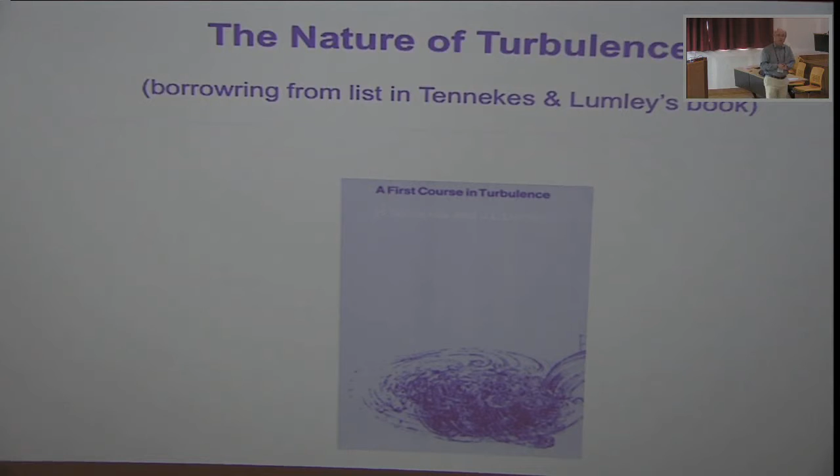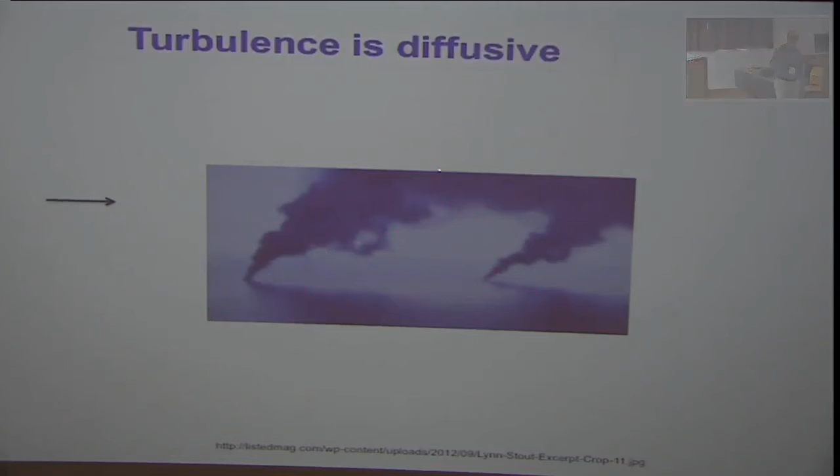And so the book starts essentially by saying that turbulence has fundamental properties such as, for example, being diffusive. So this looks like perhaps an experiment in some kind of water channel, maybe on top of some kind of metal surface that's reflective. So you see the shade of this injected dye or another fluid. It's turbulent, so it's very diffusive. It grows, it mixes very effectively. But turbulence is not just that, it's also a property of a continuum, and it's multiscale.

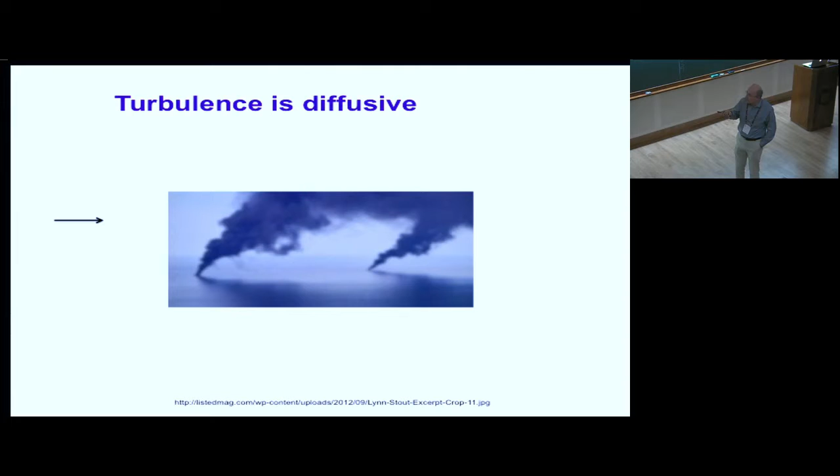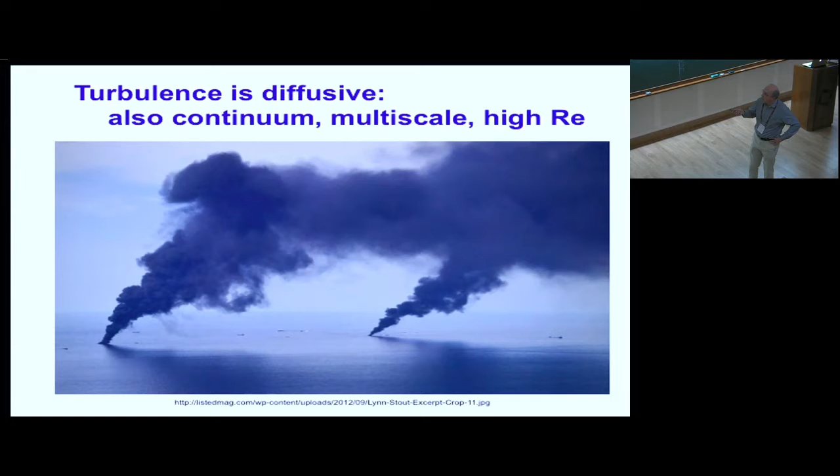And this picture, as a matter of fact, I just fooled you. This is not in a laboratory tank with a reflective metal surface. It's a photograph of fires following oil spills, and this is in fact the ocean surface. You can see the little ships here. And so I guess the sense of scale is important. We cover a lot of scales, the main theme of this conference. And here we see the diffusion happening as well. In this case, it's a very high Reynolds number. Turbulence is multiscale, so these are other properties of turbulence that are worth remembering.

Again, in terms of diffusion, you can also look at how a surface will be deformed and particles on the surface will be mixing together. This is a famous experiment done at Hopkins by Mike Karweit in isotropic turbulence, the wrinkling of a surface. This is done on a computer using direct numerical simulation. Again, just figures of the diffusion of turbulence.

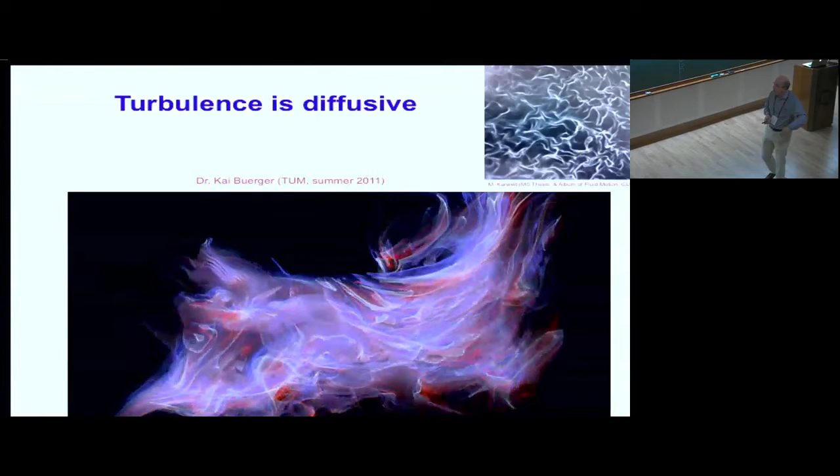This is not a movie. Normally the mixing of cream and coffee is meant to illustrate mixing and diffusion as well. Here I'm asking you to imagine that you first stir it and there's some turbulence happening and then you just let it be. And obviously turbulence is also dissipative in the sense that kinetic energy is dissipated. So imagine the decay of kinetic energy in these eddies illustrating the dissipativeness of turbulence.

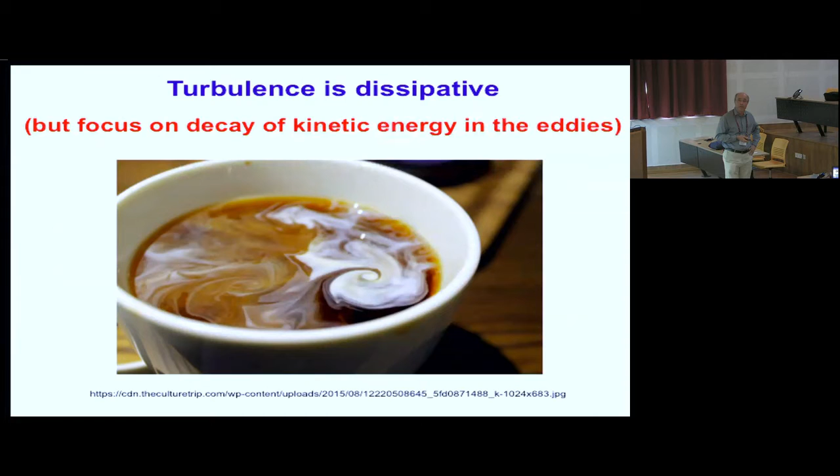There's vorticity fluctuations, and it's three-dimensional. This is obviously now a very classic way of visualizing the small scales of turbulence. In this case, we're visualizing the magnitude of the vorticity squared, and so it's a visualization of the famous Kolmogorov scale worms, tangles of turbulence.

One other aspect that I think is quite noticeable is the fact that this is clustered. It's not the spatially uniform distribution of vortices. There are regions where there's more of them. Here there's a lot of them, and then there's these kind of more dead regions. This is associated with the multiscale structure of small-scale intermittency.

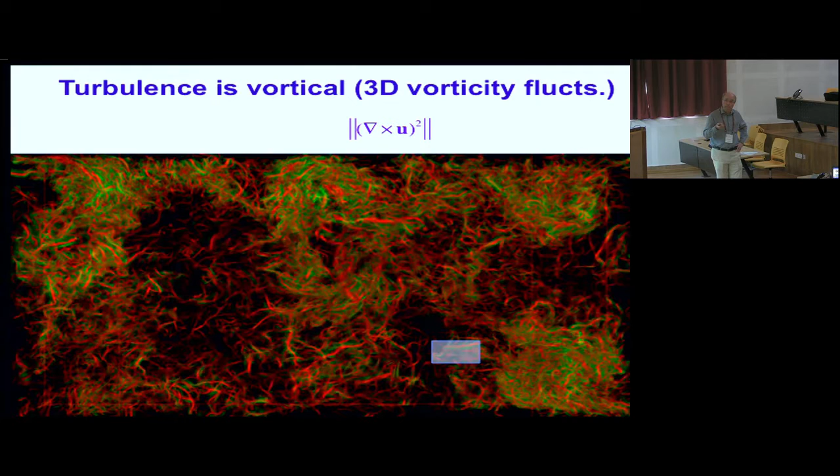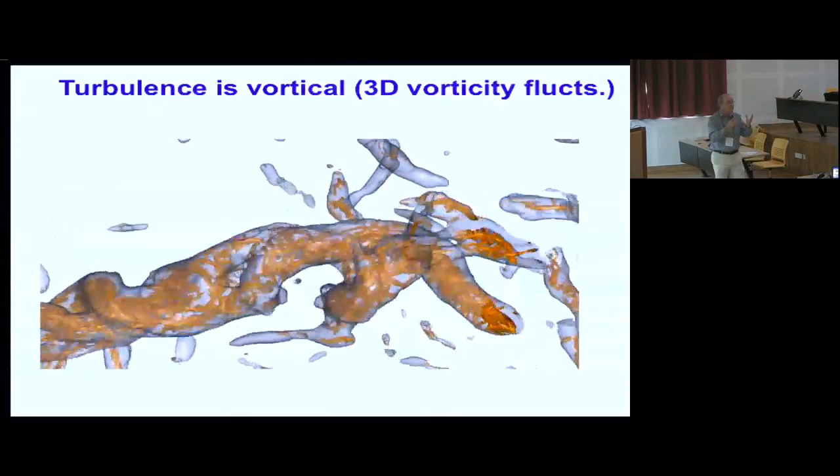If you zoom in here, you can actually create the following animation. So in the preceding talk, Professor Zubrek mentioned the tangling of quantized vortices, that you can in fact coarse-grain them and look at them at bigger scales, and then some more classical-like phenomena occur. This is from a direct numerical simulation of isotropic turbulence, where, I actually want to go back to the preceding one, this one.

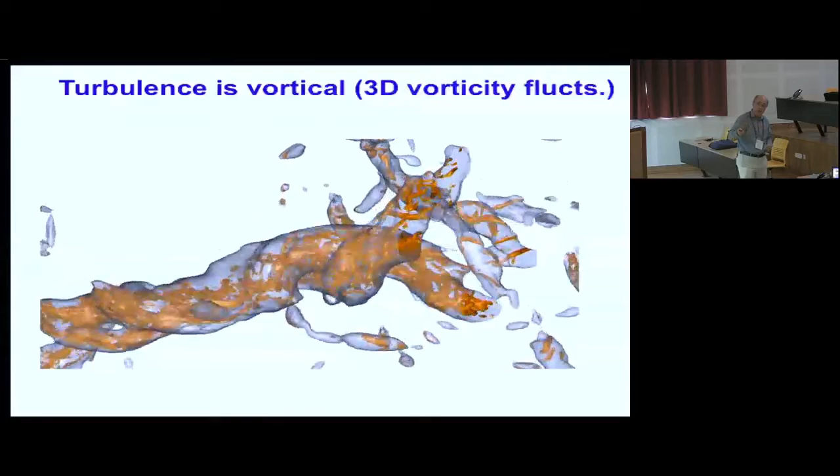So what we've done here is we've filtered the velocity, calculated the vorticity, and generated, in some sense, coarse-grained vortices, and then looked inside those vortices at the Kolmogorov scale, small-scale vortices, and you can see how they're grouped together, forming this larger scale one, but the larger scale is, in fact, twisting and stretching the smaller scale motions. Here you can see a superposition of the same thing at three separate scales. So three-dimensional, time-dependent vorticity fluctuations.

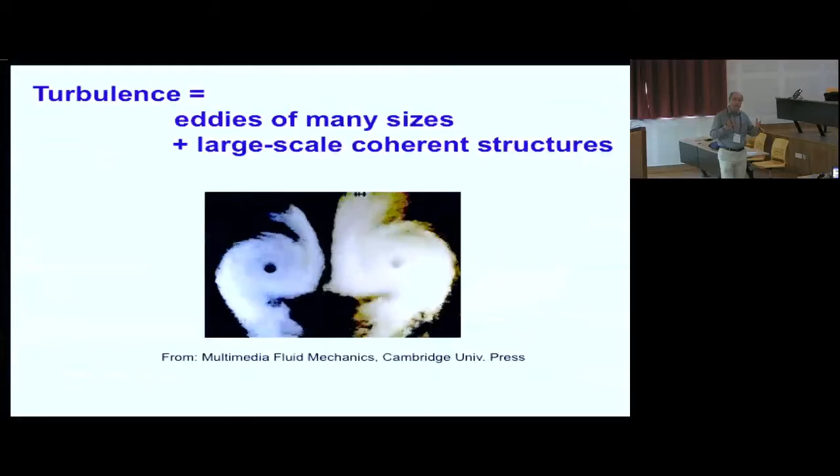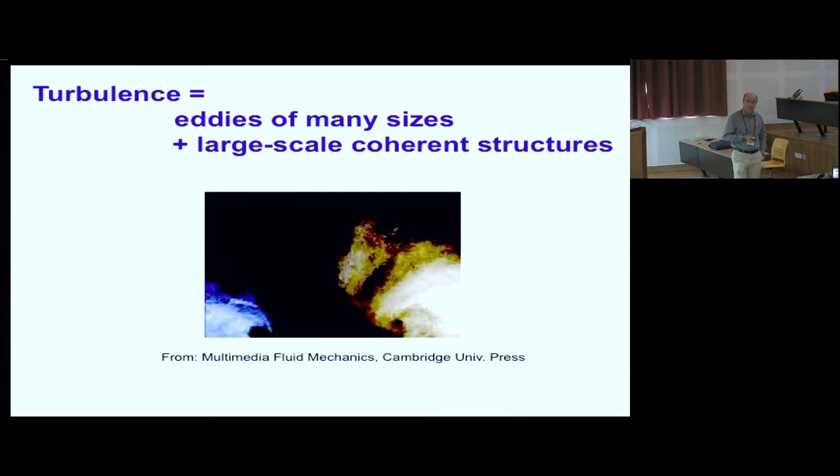This particular one is not really in Tennekes and Lumley, but one might want to add that there's eddies of many sizes in turbulence, but also there's presence of very large-scale coherent structures that are often very long-lived and are very visible in turbulence. And there's a lot of very fruitful research in coherent structures that has occurred.

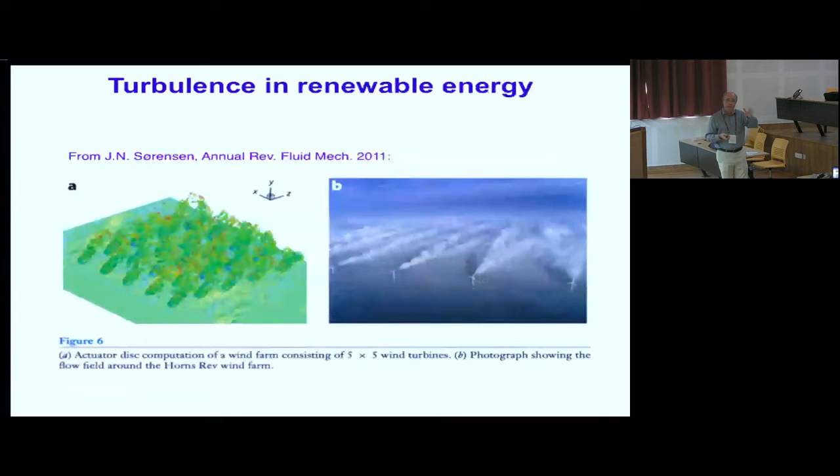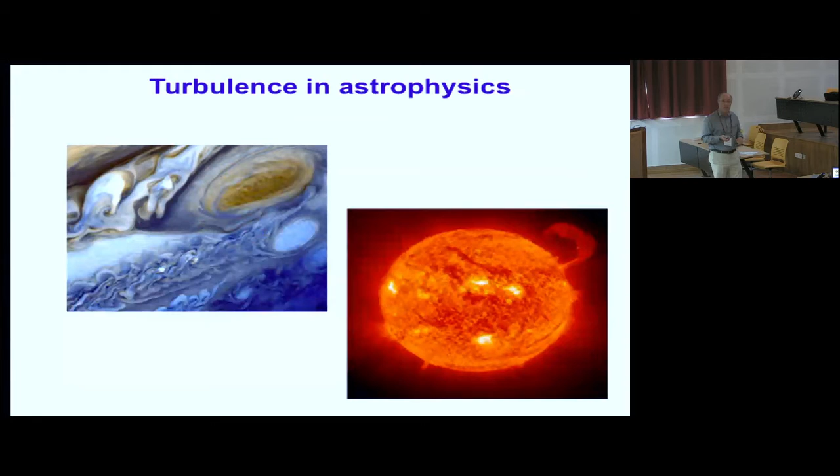In terms of applications, aerospace, combustion, environment, renewable energy. Tomorrow I will talk quite a bit about this one. Again, geophysics, environmental, astrophysics, going to bigger scales. So these are the things that you know.

The simplest type of turbulence, as we know, is isotropic turbulence. I'll talk quite a bit about isotropic turbulence, as a matter of fact, because as you will see, we will be specifically interested in the rates of decay of turbulence. Turns out that's a really important aspect when we need to model turbulence. And this is generated in a wind tunnel. You can generate it with a grid.

It can be a regular grid, or here we built an active fractal grid to inject turbulence at multiple scales. And then you have turbulence in the core here, over small distances, that is statistically reasonably close to isotropic, and then as you follow the mean flow, it decays at a particular rate. This is obviously the canonical, simplest type of turbulence.

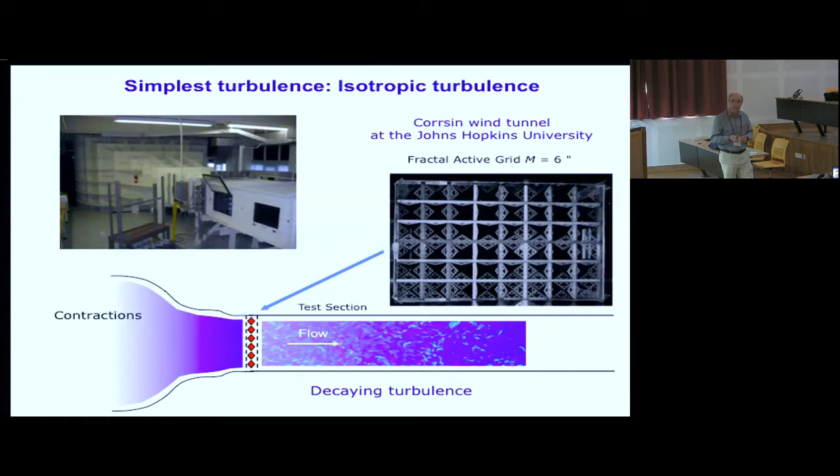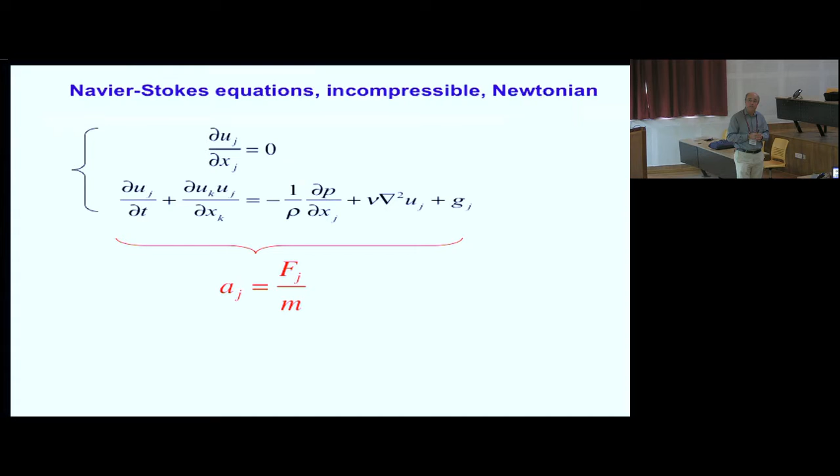So, in terms of describing turbulent flows, again in the classical world, we will focus on incompressible single-fluid Newtonian fluids. So the Navier-Stokes equations, essentially F equals ma. Very familiar to us, and the three classical, typical levels of modeling, if we are faced with a problem of predicting a particular flow, occur at the following three levels.

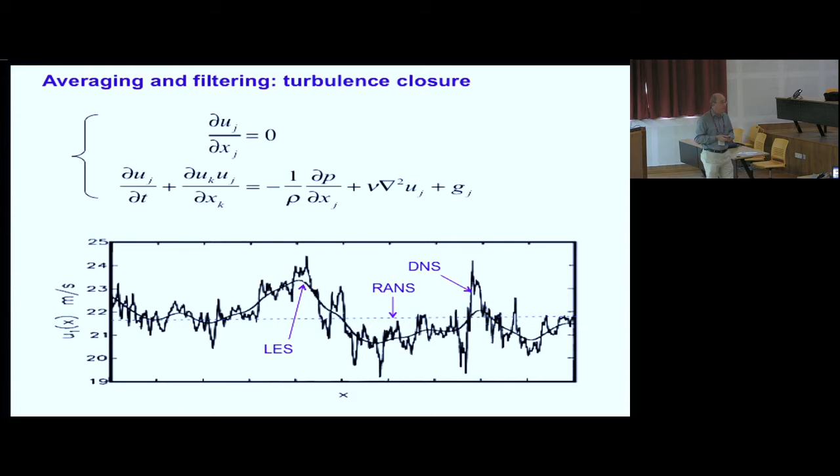So direct numerical simulation, where we're resolving all the scales. At the other extreme, if we do either an ensemble average or, for statistically steady state flows, time averaging, we are talking about the world of Reynolds-averaged Navier-Stokes. And then what I will spend most of the time on is Large-Eddy Simulation, somewhere in between, where we keep some of the larger scale motions directly resolved on our computer, and we are faced with a challenge of parametrizing the effects of the small scale motions that are not explicitly resolved on our grid. So that's what I will spend most of the time on.

In terms of the traditional engineering approach, there is a Reynolds decomposition. Obviously, it's over 100 years old, where you take the Navier-Stokes equations and you perform a linear operation in terms of averaging. Again, it can either be ensemble averaging or time averaging. Let's imagine we do time averaging for statistically steady state flow, so this first term here will drop.

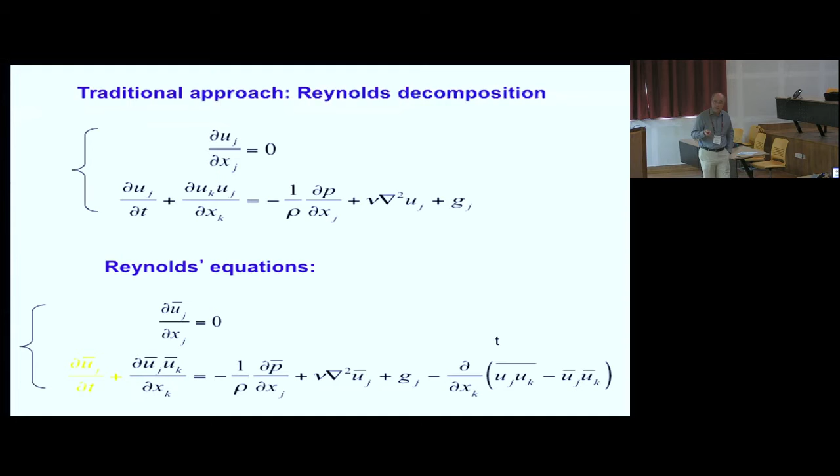And the simplest way to do this is to put an averaging operator on top of each of the terms and then rewrite the advective term by sums and differences, I don't know what this T here is, by putting the term that we used to have here on the right-hand side with a minus sign, so it's essentially the average of the nonlinear advective term, and then add and subtract on one side the product of the averaged velocities. And this is, of course, the Reynolds stress tensor that needs to be parametrized and is modeled in Reynolds-averaged descriptions.

Normally you will perhaps not have seen it, or it's not normally written in this way, but obviously using the properties of averaging, this expression, essentially taking the Reynolds stress to be the difference between the coarse-grained nonlinear, or the coarse-grained momentum flux, minus the momentum flux due to the coarse-grained velocities, and those two things are obviously not the same, that difference can also be written as a covariance between the fluctuations. And so typically this is a more familiar way of seeing the Reynolds stress tensor. That's kind of all I will say about Reynolds averaging.

Now it turns out, sorry, I'm kind of not doing this. So it turns out that to model this stress tensor, to model these correlations between fluctuations of turbulence, the internal structure of turbulent flow becomes very important. So now it really becomes important to understand how turbulent eddies, how different components are correlated, what are their length scales, what is the shape of these eddies. All these internal structural properties of turbulence enter in understanding this. And that's why we're also, from a pragmatic viewpoint, very interested in the spatial structure of turbulence.

And there, the simplest descriptor of structure is the statistics at 2 points. And so the statistics at 2 points can be looked at by structure functions, where the simplest object we can build is the longitudinal velocity increment. So it's the difference between velocities at 2 different points, and one of the components is the longitudinal one. The most famous object there is the structure function, so it's how much energy this particular velocity difference has, so that's the second order structure function.

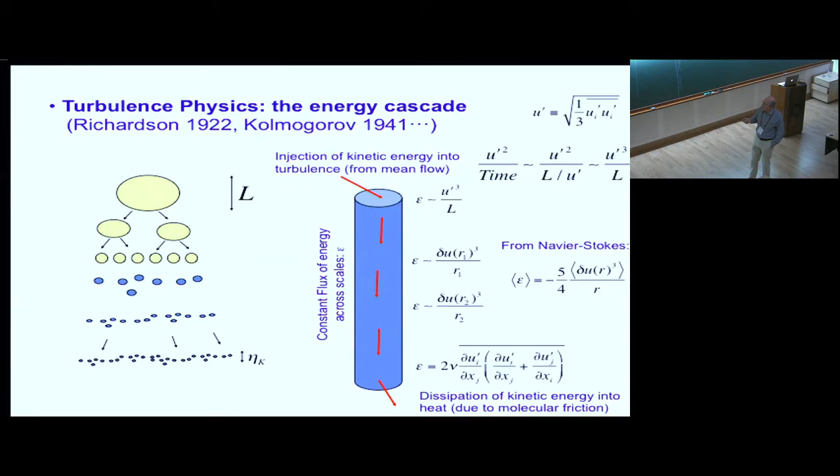And again, in terms of the dynamics and the physics of turbulence, the simplest view is, of course, the Richardson-Kolmogorov view, where if we look at the rate at which the turbulence is receiving energy by the large scales, so the large scales will have, for example, the RMS velocity squared, that will be the kinetic energy at the large scales, divided by a turnover time, you get U cubed over the largest scales of the eddies. That same reasoning, if you apply it at various smaller scales, gives rise to the notion of a cascade of energy, where the energy dissipation then takes place at the smallest scales in classical turbulence. Quantitatively, if that flux is constant, you get to the famous 2/3 law, or to the minus 5/3 energy spectrum.

In terms of direct numerical simulation, I will not say too much about DNS either. Essentially, we are now able to do this at moderate Reynolds numbers. Depends how you define the Reynolds number, what particular number one wishes to quote as where DNS is possible. But essentially, if we are able to simultaneously resolve some small fraction of the Kolmogorov scale, as well as the system size where the large eddies are present, then we can do DNS, but at higher and higher Reynolds numbers, obviously, direct numerical simulation becomes impossible, because we cannot afford a grid fine enough to resolve down to the Kolmogorov scales.

So that brings us then to the realm of what's called large eddy simulations, where essentially we want to do a spatial coarse graining of the flow so that we can do simulations in a more affordable way. And so, for example, here, this is a DNS of 1,000 cubed where you see color contours of a velocity. This has about 4 times 10 to the 9 degrees of freedom. This is quite expensive to do.

If I want to do a large eddy simulation of this, I might imagine first applying some kind of coarse graining operation on the spatial distribution. Could be some kind of spatial filter, for example, and bring this down, for example, to 10 to the 5 degrees of freedom. This is something that can be very quickly computed nowadays and is more practical if we needed to do simulations of some system where we want to vary a lot of parameters and do a lot of inexpensive simulations.

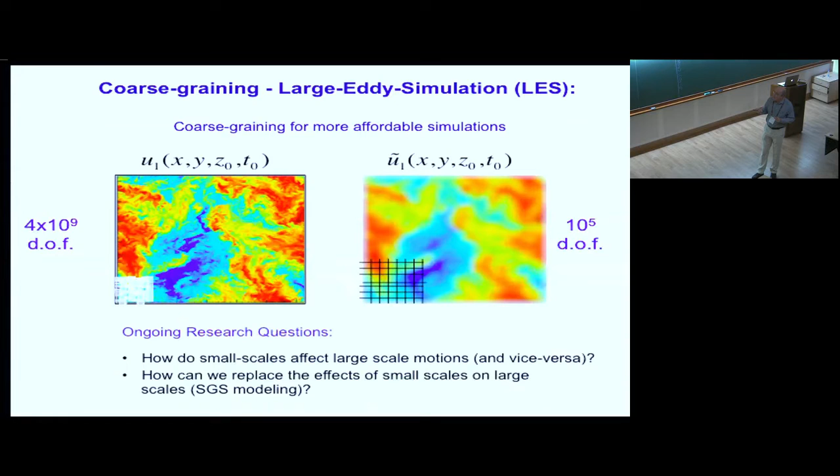In terms of the nomenclature, I will use a tilde to denote filtered properties. And so in terms of the mechanics, how you move forward in LES, you would again start from the Navier-Stokes equations and again define the filtered velocity. This is this coarse-grained velocity field as a convolution with some spatial operator. This is a filter, could be a spatial filter with a characteristic scale delta applied to this velocity field.

And then very much like the ensemble averaging that we did in Reynolds averaging, we will apply this operator to this entire equation. And if you do that, then you essentially put a filter on top of this. Now, obviously, this is a time-dependent flow, so we cannot get rid of the time-dependent term. The nonlinear term here now is simply filtered. Here I'm using the fact that the spatial filtering and the derivatives will commute. There's some technical details there. That's not always the case, but typically it is. And so the other terms just get this tilde on top.

Now, this is, again, just like before. It's just going to be rewritten by writing this filtered momentum flux in terms of the product of the filtered velocities, and the difference between the two is put on the right-hand side as the divergence of a stress tensor, and this is the so-called subgrid scale stress tensor. And so, again, it has exactly the same physical interpretation. It is the difference between the momentum fluxes when you take the actual momentum flux and you coarse grain it, and you subtract from it the momentum flux that you would have gotten if you had used the filtered velocity, the coarse-grained velocities, to evaluate the momentum fluxes.

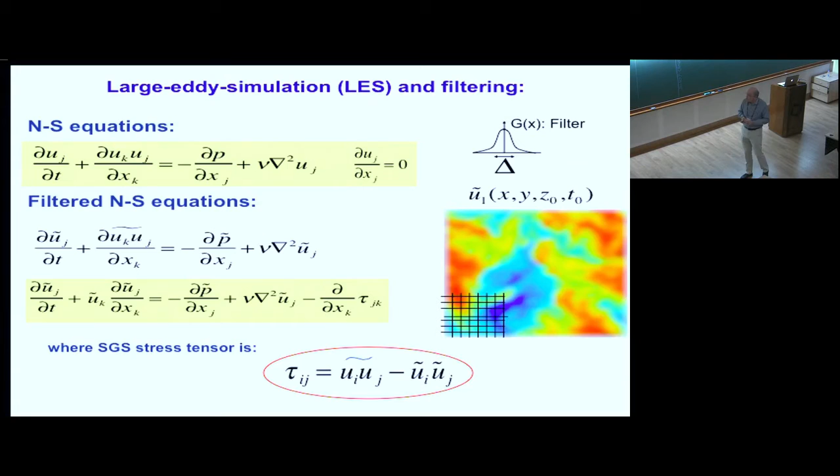So that's the basic quantity that needs to be parametrized. Obviously, this is an unclosed quantity. If you want to put it in this equation to solve this on a computer, we need an expression for this. And here, again, I'm going to just summarize the simplest possible approach, which is to say that the isotropic part of the stress tensor typically can be absorbed into the pressure, so it doesn't really have any dynamical effect.

The deviatoric part of that tensor, if we choose to model it with an eddy-viscosity assumption, is expressed in terms of the symmetric part of the velocity gradient tensor, essentially that these stresses are going to be proportional to the rate at which the fluid at the large scale is being deformed. And in front of this is an eddy viscosity, the subgrid scale eddy viscosity. Now, the big question, even if we accept this, is, of course, how much is this eddy viscosity?

Now, dimensionally, the usual arguments go, this is going to be some length scale multiplied by a velocity scale. So we need a length scale. In large eddy simulations, if your filter scale is in the inertial range or not too close to the integral scale, that does provide a length scale. So typically we pick that as the length scale, and then a velocity scale needs to be picked. And by the usual arguments of closure theory, it has to be things that are Galilean invariant, so it can't depend on the velocity of the frame and so on.

So some norm on the velocity gradients or velocity differences is the best approach, and so you can take the norm of the symmetric part of the velocity gradient tensor, multiply by this length scale. That will give you a velocity scale, and so this gives you delta times the absolute value of the strain rate as the quantity that the eddy viscosity is set proportional to, and then there's a dimensionless parameter in front that represents our ignorance of the problem, and that needs to somehow be determined.

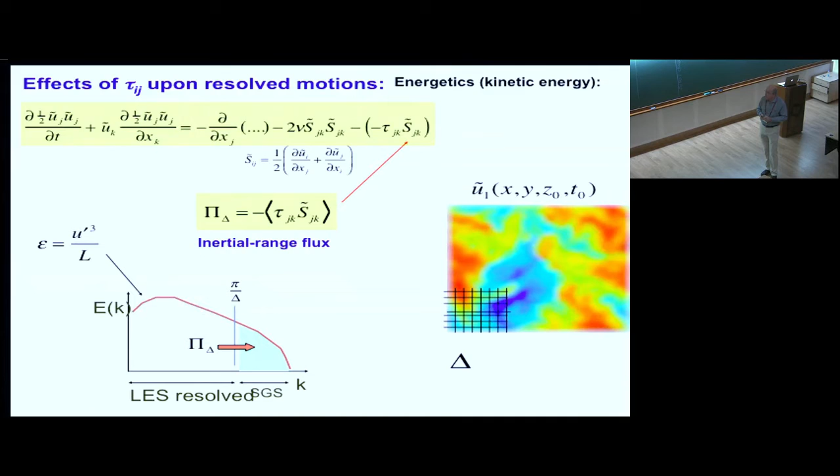Perhaps an addendum to that thought: from the filtered Navier-Stokes equations, similarly to the derivation of the von Karman-Howarth and the Kolmogorov equation, you can repeat that exercise, and for isotropic turbulence, you can derive a sort of 4/5 law for the large scales in large-eddy simulations. If you do that, you show that for the third-order structure functions of the large-scale velocity fluctuations, instead of the molecular epsilon, we obtain this subgrid stress mediated flux of energy in the inertial range. And then there is this additional term that can be shown to be relevant only at scales close to the filter scale.

This is not unlike the viscous term in the original equation, but it is now entirely in the inertial range, and it represents correlations between the subgrid stress tensor and velocity increments at that scale. So in some sense, to get the statistics of the large scales correctly in LES, one can show that there really is a hierarchy of conditions that you want the model to reproduce. The most important one is that the correlation between the stress tensor and the strain rate be such that you get the right extraction of kinetic energy.

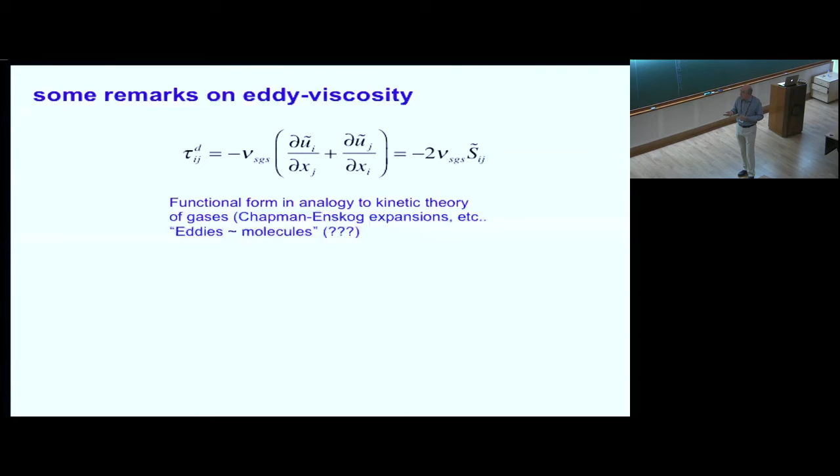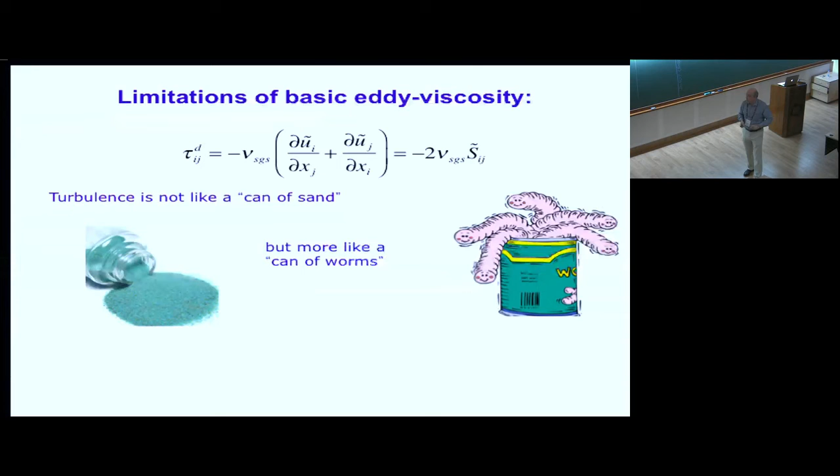One could say that turbulence is not like a can of sand that we shake, but it's perhaps more like a can of worms, that you shake it and inside things are happening, and there's these worms rotating and some memory and so on. So taking this into account, let me just go over a few steps that provide what one might term perhaps a more fluid mechanical rationale or basis for what we call eddy viscosity.

So for this, I kind of need to step back a little bit, and I will do this really in the framework of Large-Eddy-Simulation. So we will be talking essentially about filtering things, and there's a cutoff scale, and what I need to predict is the deviatoric part of the stress tensor. And so again, this is the quantity that we want to predict. It's close to, again, there's a J missing, the kind of covariance tensor of the fluctuations.

And so that is one object. Later on, when we're towards the end of the derivation, the object that I will in fact be really wanting to describe will be the conditional average of this local covariance tensor, given that the large scales have a certain velocity gradient structure. So A is going to be the full velocity gradient tensor at the large scales, and what I will want to predict is the conditional average of this. This can be shown to be, in some sense, the best statistical predictor of the subgrid stress.

So this is the object I would like to predict, and we will not use analogies with kinetic theory of gases. So instead, we will use the following. So imagine I have the small scale. So U prime is some representative small scale fluctuation, and imagine the flow. It is a vector pointing in a particular direction, and imagine that this region of the flow, the large scales are such that there is a velocity gradient tensor A tilde.

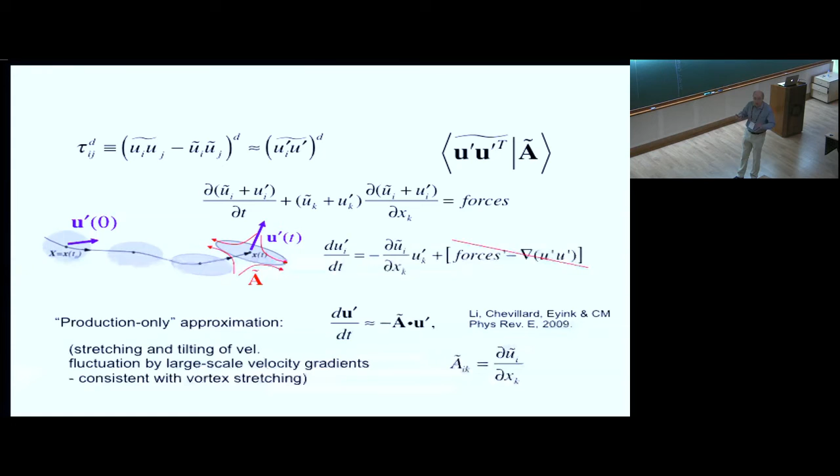So if I follow this in time, this has a very simple solution in terms of matrix exponential. So the u prime at some later time will simply be the matrix exponential of this. Now, the second assumption I'm making is that A is slowly varying. So I'm assuming that A over this time that I'm going to integrate this has not changed. Otherwise, you have to make this a little more complicated. But I'm going to assume that this A in this kind of neighborhood for a certain amount of time is so slowly varying that I'm not changing it.

So again, now I'm putting in this notion of separation of timescales. And then this is again the initial condition here. And then if, let's say, I don't continue for a very long time, this can be expanded, and this is the expansion of the matrix exponential. So now I need to assemble the stress. So I'm going to take this dyadic product. I'm going to take the product of this times the transpose. So here's the transpose. And now I'm going to evaluate this conditional average.

So now I need the conditional average of this quantity. But because it's conditioned on the large-scale velocity gradient, this can go outside of the averaging. So this term here, again, I've done this short time approximation, is outside of the averaging, and I only have the conditional average in terms of the initial condition inside here. So this u prime and this u prime is our conditional average at the initial time.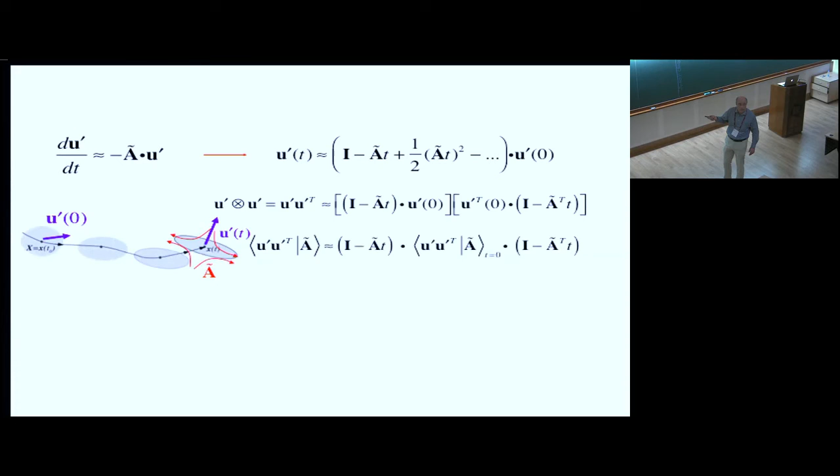And now this is the sense in which I think the eddy-viscosity models assume isotropy. If I assume that the expected value of my initial condition, which happened some time ago before where I really want to predict the stress, is isotropic, so I assume this is an isotropic tensor, it's just going to be proportional to the identity, and of course it has to have units of energy, so I will construct units of energy based on the scale and the velocity gradient itself.

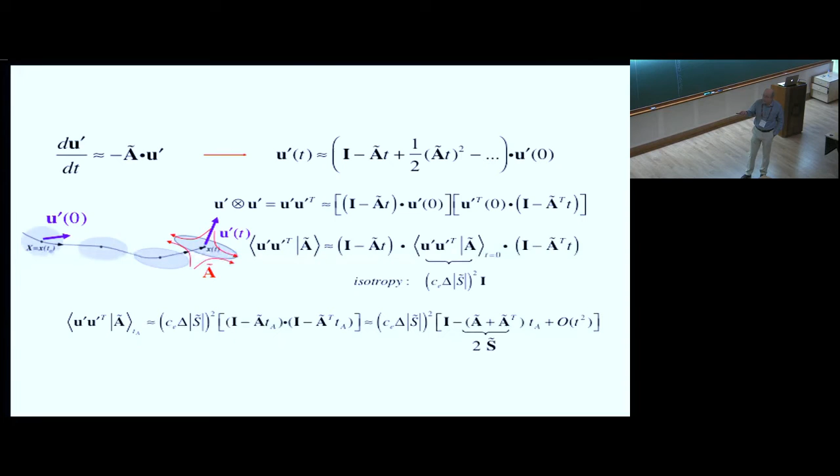Then I replace this with the identity, and then you put the identity here, now you simply get this term, and you get that this full stress becomes the identity minus, and here you have A plus A transpose. And that brings us to twice the symmetric part of the velocity gradient tensor. So very naturally then, if I assume that I've pursued this evolution over time scale TA, that becomes my eddy viscosity, and the tensorial structure of the stress is in fact proportional to the strain rate.

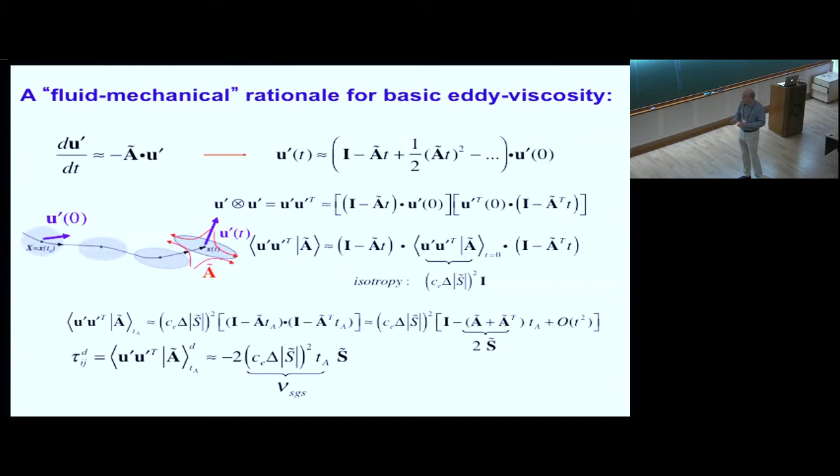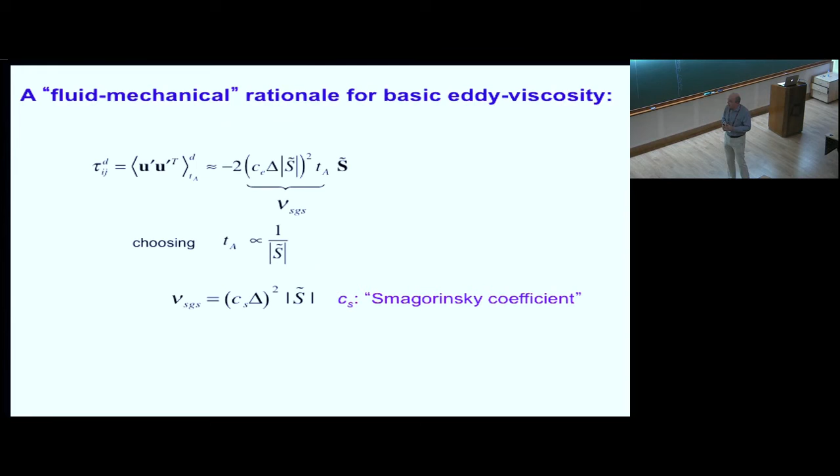That's from this argument, essentially following fluctuations that get tilted and deformed by the large-scale velocity gradient. I haven't really made any statistical assumption or kinetic theory of gases. So I just thought it'd be kind of interesting to mention this other interpretation, which might be why eddy viscosity isn't as bad as one might think in many cases.

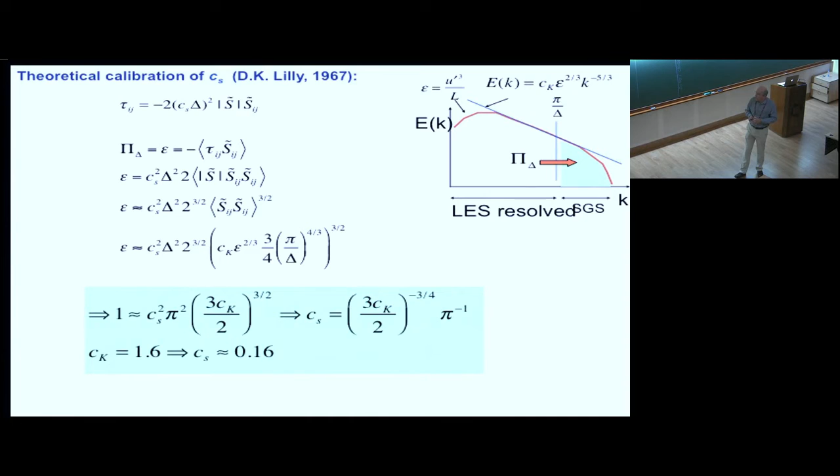So going back to the problem of how large should this coefficient now be? How large should this Smagorinsky coefficient be? Let me show you a few things that one can do. One can, for example, interrogate data to measure it. So, for example, if you can measure the stress tensor, you can measure the average rate at which energy is dissipated in the inertial range, and you can compare it with what the Smagorinsky model would have predicted, and take the ratio of the two, and that will be your empirically determined Smagorinsky coefficient. That's what we did theoretically for isotropic turbulence.

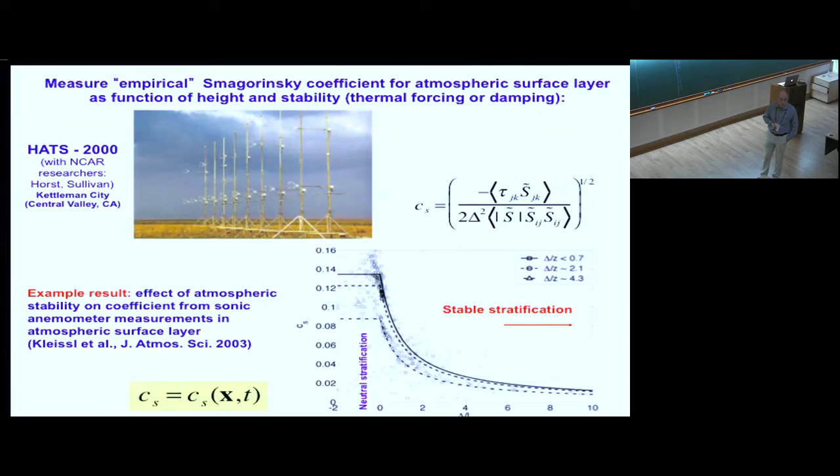So as you can see, near neutral for scales that were kind of far from the surface, we approached this 0.16 value that we had derived for isotropic turbulence. But if you have stable stratification, for example, that parameter really has to shrink dramatically, has to be reduced. So more in general, you really have to allow for the Smagorinsky coefficient to depend on physical properties, perhaps on position and time as well.

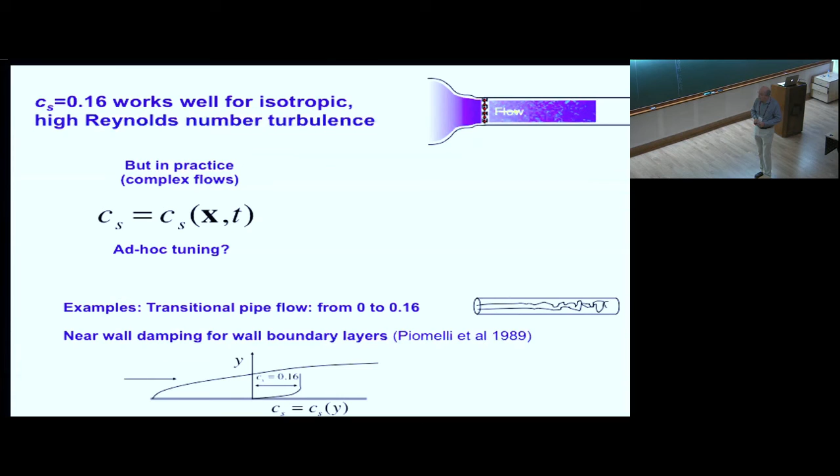I think one very typical example also is transitional flow, where if you have a laminar flow, you don't want that coefficient to be 0.16. Initially, you want it to be 0, so that you're not extracting any energy and you allow the instabilities to develop. Close to solid surfaces, that coefficient needs to be also smaller to account for wall blocking effects.

So I wanted to briefly describe what I consider quite an important development for large-eddy simulation, which is the dynamic model. This was proposed in the early 90s by Massimo Germano, who was then visiting Stanford, and this gave rise to quite a lot of research in that particular area.

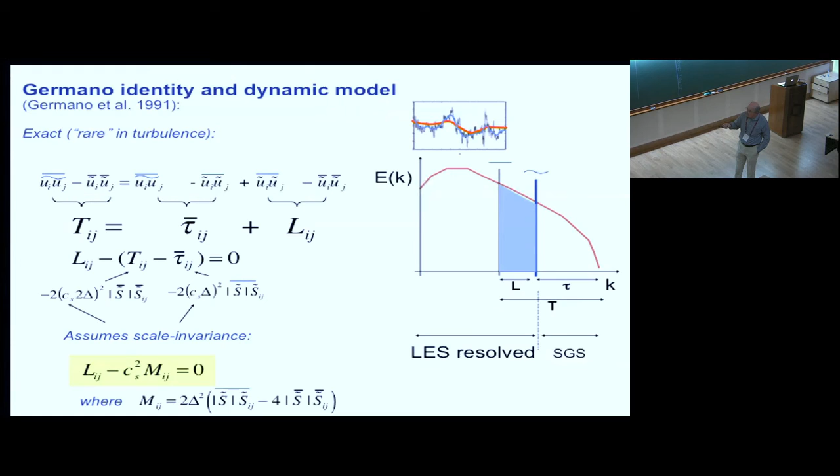So we take this identity, we write it like this, then there's several details that we don't really need to look into, but the Smagorinsky model at large scales gets put for T, at small scales for this one, and this parameter C, let's assume, is the same at both scales. That gives you an equation that can be solved online.

Now the details come in, and in some sense, even results depend on exactly how you do it. One thing you see immediately is that this is a tensor equation because I really have 6 independent equations. These are symmetric tensors, and I have a single parameter CS. And so it's an overdetermined system.

And so one approach that was immediately proposed, in fact, by Lilly was to solve for that parameter in a kind of least squares sense. If you do a least squares minimization with respect to this parameter, you find that the Smagorinsky dynamic coefficient will be the ratio of these averages of these tensors. All of these can be determined during simulation.

So essentially what this would say is that we are measuring CS by sampling the simulation, as we do it, at the bigger scales, which in LES we have available. We measure CS, and then we assume that it's the same CS for the smaller scales, and then we apply it at the next time step, if you will.

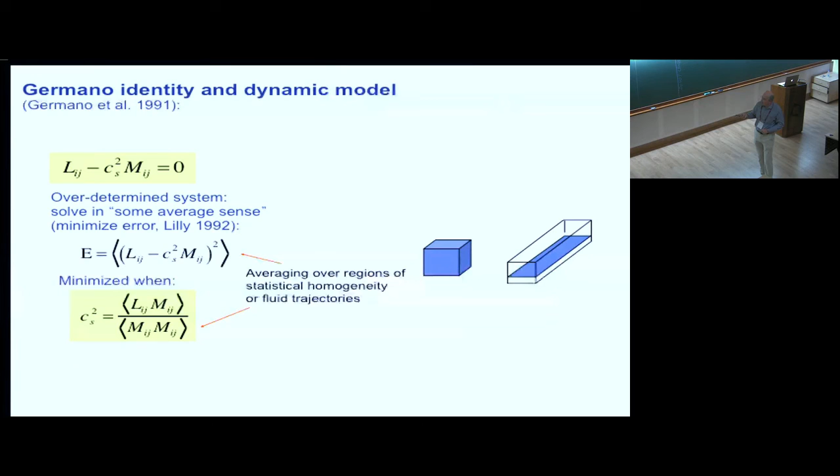If the flow was spatially homogeneous, for example, decaying isotropic turbulence in a box, this averaging is best done over the entire volume. For things like boundary layers or channel flow, things that are homogeneous in two directions, for example, you might do an averaging over planes.

I think I will probably just go to the last few slides here. Let me show you 2 more variants of this. So there was a lot of activity working with this dynamic model. As I mentioned, there's one big assumption that we've made, which is that the Smagorinsky coefficient is the same at the so-called test filter and at the grid filter. Right? We assumed that those would be the same. That allowed us to get a single equation.

If the filter scale approaches the integral scale of turbulence, as actually happens when you do high Reynolds number boundary layer simulations, where you're not really resolving down to the logarithmic region, and even then, very close to the wall, you always have the grid scale close to the integral scale. And so this assumption that the coefficient is the same at both scales cannot hold any longer.

So in this case, we've generalized the approach, and you can end up with something called the scale-dependent dynamic model, in which the way to do it is to include yet another filter scale at an even bigger scale, and then sample the large scales to learn about how that parameter changes as a function of scale. In practical implementations, you do 2 test filters at 2 different scales, you obtain parameters at these 2 different scales, and then you extrapolate to smaller scales to determine the coefficient here.

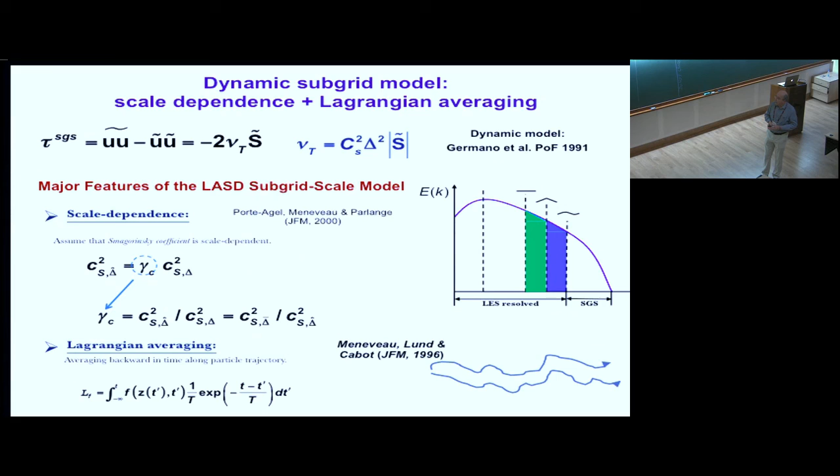In this case, the grid size is about 10 meters. We need to parametrize all the eddies smaller than 10 meters, of which there are many, down to, in the atmosphere, close to a millimeter. But we are able to resolve up to the largest scales, up to about 1 kilometer in height and several kilometers in the horizontal directions.

It would have been very difficult for us ahead of time to say, okay, we will use a coefficient that has this value at this location and so on. We find that it is low near the surface, as one expects, but then it's very high, in fact, very close to the rotors due to these shear layers. And so non-trivial behavior that we wouldn't have been able to predict ahead of time.

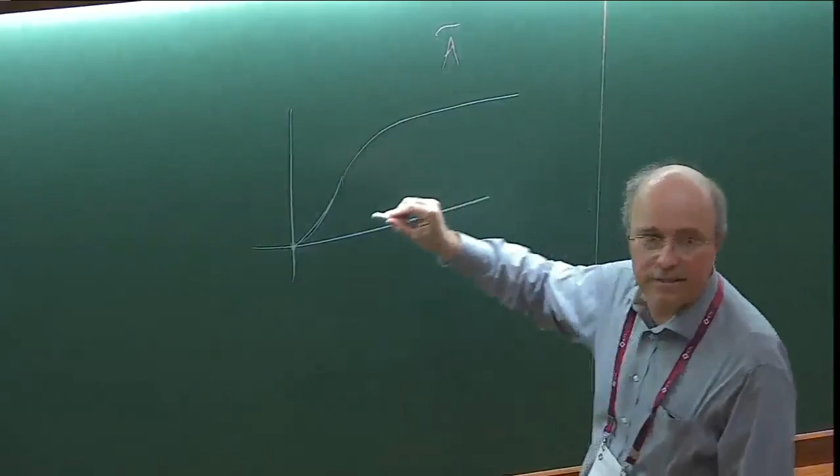But the logic behind it is essentially, you have A generating an environment that will take fluctuations and will somehow stretch them and make them grow and so on. And then turbulence has other pressure strain and other effects that will try to make this like this. The typical turbulence models find this level by making a balance between production and dissipation and setting the unsteady term 0.

In a nutshell, what we're doing here is we're looking at the time scale here and getting this level by multiplying the slope times this time scale. And so your question is, what is that time scale? And that's where, again, the empiricism comes in. It's essentially turnover time that's estimated in the usual way. But this reasoning gave us insight into the tensorial structure, how these vectors and tensors would evolve.

Would you bring this fact into the model straight away, rather than just changing the value of the Smagorinsky coefficient? Yeah, very good question. So when we do simulations with a dynamic model for stable boundary layers, for example, we find that indeed the dynamic coefficient is reduced, automatically. I hate to say automatically, but because the large scales are explicitly affected by stratification.

So what happens is at the larger scales, that turbulence is already damped by the stratification, and that leads to a reduction in the parameter. But it's not quite at the correct length scale. But if we do the scale-dependent one, it's a better result. So yes, it has that effect, but it's not built in through a formula, but through this dynamic procedure.